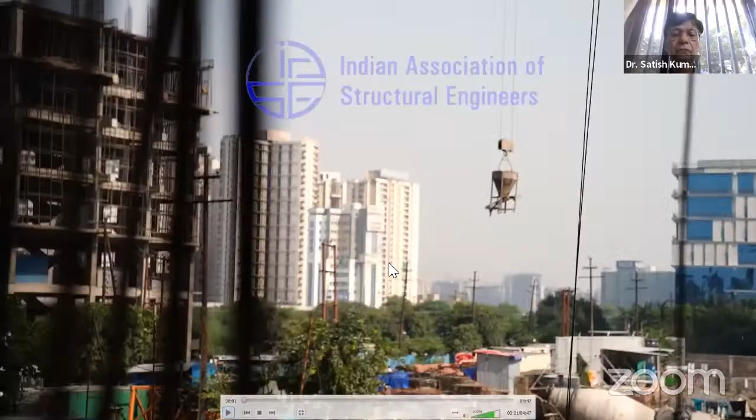The Indian Association of Structural Engineers, also known as IAStructE, was conceptualized and constituted in the year 2002 by a group of senior professional structural engineers from all over the country. IAStructE is registered under the Societies Registration Act 21 of 1860.

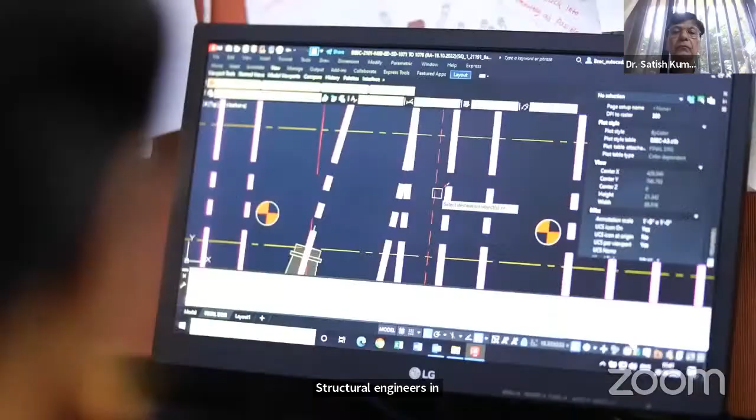IAStructE is a national apex body of structural engineers in India with a mission to promote the structural engineering profession and cater to the professional needs of the structural fraternity. In the short span of two decades, the association has attained an eminent position in the professional field. Its membership is valued very highly in the profession.

Since inception, IAStructE has been led by eminent structural engineers like late Shri Mahendra Raj, late Shri Kumar Ghosh, Shri Subhash Chand Mehrotra, Professor Mahesh Tandon, Shri Alok Bhaumik, Shri Manoj Mittal and Professor R. Pradeep Kumar as its president.

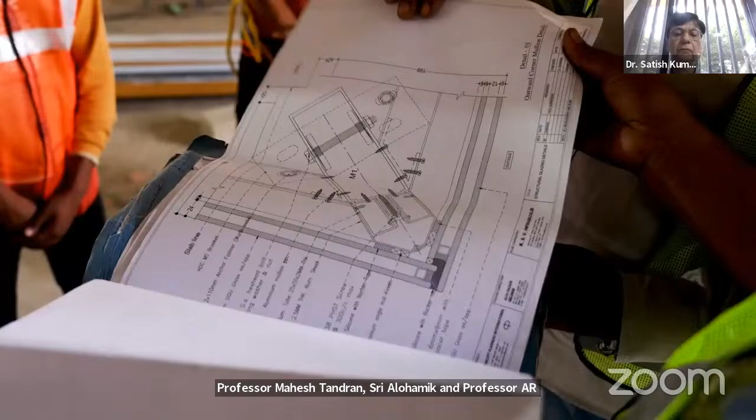IAStructE is a permanent member of the Engineering Council of India and interacts with the government on professional and policy matters related to civil and structural engineers. To expand its reach, IAStructE has collaborations with various international professional like-minded associations and institutions.

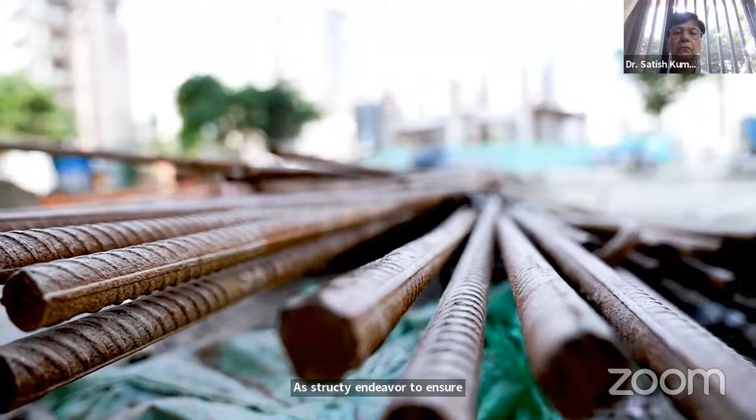IAStructE's prime objective is supporting and protecting the profession of structural engineering by upholding professional standards and acting as a mouthpiece for structural engineers in India. IAStructE endeavors to ensure that its members develop the necessary skills in structural engineering and work to the highest standards by maintaining a commitment to professional ethics and standards.

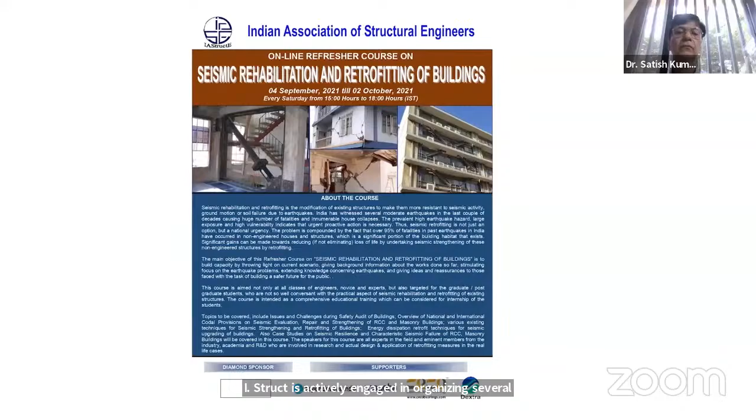IAStructE is actively engaged in organizing several continuing professional development (CPD) courses for structural engineers to help them update their knowledge and advance their career paths. It also conducts refresher courses for young and practicing engineers and student-oriented programs.

Seminars, workshops, conferences, technical lectures and discussions related to the latest technological advancements and case studies are also organized regularly for members to enable them to continuously update their knowledge and skill set by interacting with the best minds from the industry. IAStructE's activities are widely appreciated and known for quality technical content.

IAStructE is also actively engaged in publishing its quarterly journal Structural Engineering Digest (SED), code commentaries, professional guidelines and a monthly newsletter. IAStructE's publications are becoming popular with time.

IAStructE has representation in various technical committees of BIS and IRC as well. Its members are actively contributing to National Code Formulations.

In the year 2020, IAStructE started a National Awards competition to stimulate interest in the structural engineering field and to promote innovative thinking and creativity. The awards are presented to winners in recognition of their outstanding contribution to structural engineering in categories which include Outstanding Structure, Outstanding Structural Engineer, Outstanding Woman Structural Engineer, Promising Young Structural Engineer, and Best Master's Thesis in Structural Engineering.

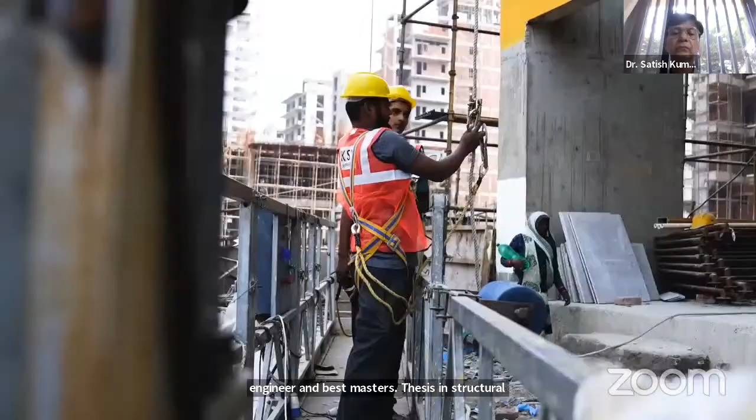IAStructE is currently operating from four regional centers, namely Eastern, Western, Northern, and Southern, with its headquarters in Delhi, to inculcate professional culture and provide handholding to budding engineers. IAStructE also has student chapters in several leading engineering institutions.

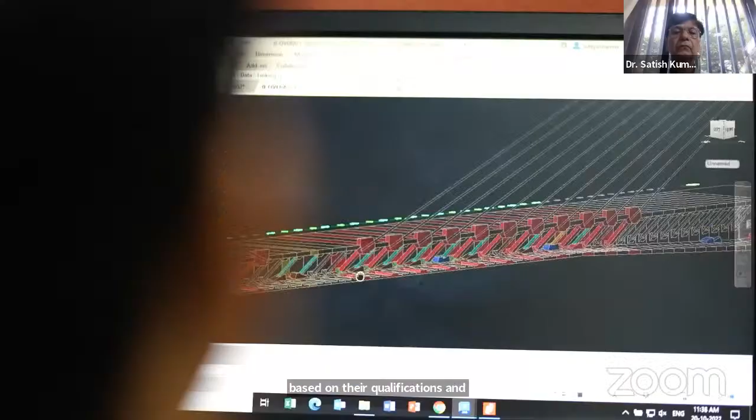Membership of IAStructE is open to all civil and structural engineers engaged in the structural engineering profession. Members are elected based on their qualifications and experience in different grades as per eligibility requirements prescribed in the bylaws. Each application is carefully scrutinized before electing the members.

More information about IAStructE is available on its website, www.iastructe.co.in.

Yeah, Dhawan sir, please start. Okay.

So today I am making a presentation on a very important topic of earthquake-resistant design of foundations. For the information of dear participants, may I submit that there is a dedicated course on the same subject being conducted by Professor B.K. Maheshwari of IIT Roorkee.

I was myself a beneficiary of that course. 18 people qualified in that course, and I am one of those 18 people. I am still a learner, like our coordinator, respected Dr. S.K. Dhawan ji, who got his doctorate at the age of 77. I am still a student, a learner, and NPTEL courses I am still undergoing. I am entering now for the 12th certification course. This was one of the certificates which I earned from NPTEL, an organization funded by Government of India. So this single lecture obviously cannot replace those 40 lectures by that IIT Roorkee professor.

So I will be discussing some basic issues relating to the subject matter. Here in the inset, we see the photograph of Japan on 1st of January this year when we had an earthquake of magnitude 7.6, which caused casualties of the order of 160 persons there.

Here, let us have a look at the Mother Earth. Outside we have the crust, then we have the mantle. People have classified this mantle also into upper mantle and lower mantle. Then we have outer core and inner core. At the crust, we have various temperatures, 30 degrees, 20 degrees, 0, sub-zero also. As you move toward the interior, toward the center, temperature rises up to around 5,000 degree Fahrenheit. So here you have a solid mass near the center.

The outer core has molten material. This inner core has nickel, iron, etc., and specific gravity of the materials is of the order of 13.5 to 14. Whereas at the ground surface, specific gravity of the material is of the order of 2.6, 2.7, etc. So as you move towards the center, specific gravity rises. Average specific gravity of the material across the radius of this earth is of the order of 5.5, and there are temperature differentials also, so there are thermal gradients across the radius.

Below this crust, you have rocks and soils, etc., and these rocks are fractured. At macro level also, there are 7 major plates. Our area falls in the Indo-Australian major plate, and there are 14 minor level plates which have been identified by geologists. So there are thermal gradients across the radius.

The Earth is moving about its own center, and it is also moving in the solar system. There are cracks and fissures within the body of the Earth, and because of such actions, there is lava eruption from time to time in various parts of the world. In India also, there is one barren island located in the Andaman and Nicobar Islands, where we have this volcanic activity every day. That particular island is burning every day, but there is no habitation there. In Japan, there are lava eruptions at a number of places, and this is one of the causes of earthquakes.

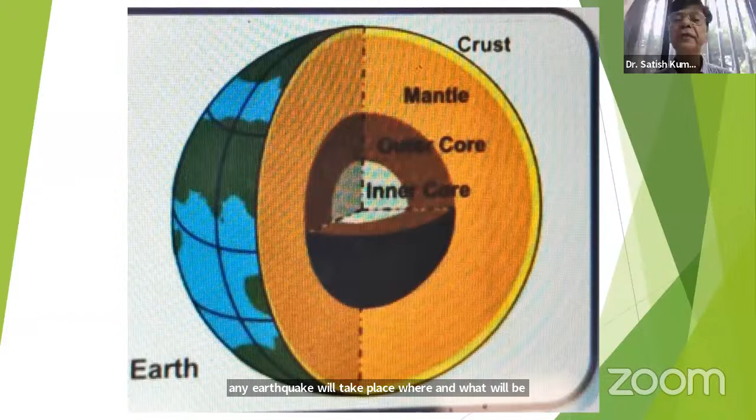Below this lithosphere, the top one, say around 100 kilometers or so, material is relatively fluid, and in the outer core it is all liquid material with quite high specific gravity. So in this type of unstable floating system at macro level, we can never say when any earthquake will take place, where, and what will be the magnitude of that earthquake. So the whole thing is very probabilistic. We are placed in a situation where we are neither sure about the magnitude of the forces, nor sure about the resistance of the soil also. Of course, a lot of research is going on, and I will show some of the slides relating to that.

Let us have a look at the basic terminology. Here we see the ground surface, horizontal one. Then this is a fault line. Fault line is a weak plane, and most earthquakes happen with focus lying along this fault line. The point where this release of energy takes place is known as focus, or hypocenter. The point vertically above the ground is known as epicenter. And the distance from this epicenter to focus is known as focal depth.

When we talk about magnitude of an earthquake, it relates to the extent of strain energy released at the focus. When we talk about intensity, it is what we feel at various places on the earth. For example, near the epicenter, intensity will be maximum. As you move away from the epicenter, this intensity comes down.

I have seen that many times, many of our enlightened friends holding doctorates also mix up intensity with magnitude. Both are quite different. Magnitude is at the focus, intensity is at various places on the earth. For example, on New Year this year, Japan faced an earthquake. In Japan, they felt the intensity, whereas in our country, we did not feel anything. So there is a lot of difference between magnitude and intensity, which we must know.

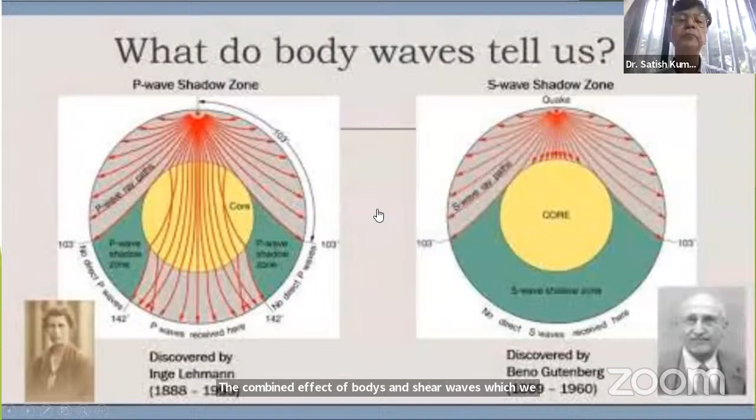Here in the insert, we see a photograph of Lehmann toward the left who discovered the P wave, which we call compressional wave also. Towards the right, we see the photograph of the discoverer of S waves. P waves we also call primary wave or compression wave, and S waves we call shear waves also, or secondary waves. So the combined effect of body waves and surface waves, which we see at site at various locations, our foundation and superstructure react to the action of these body waves and surface waves. On the left, we see the propagation of body waves, and the effect on our structures and foundation, which could cause instability of the soil also.

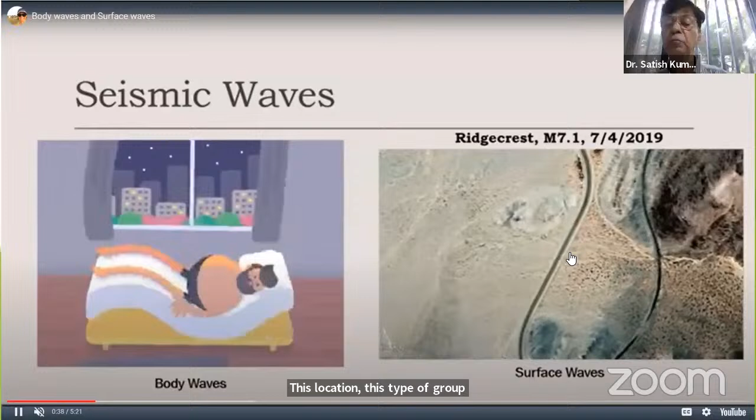On the right, we see a photograph which shows the ground movement due to propagation of surface waves. This photograph was taken 5 years back in America, where an earthquake of magnitude 7.1 struck. This type of dislocation, this type of ground movement, can cause a lot of damage to the foundation and to the structure.

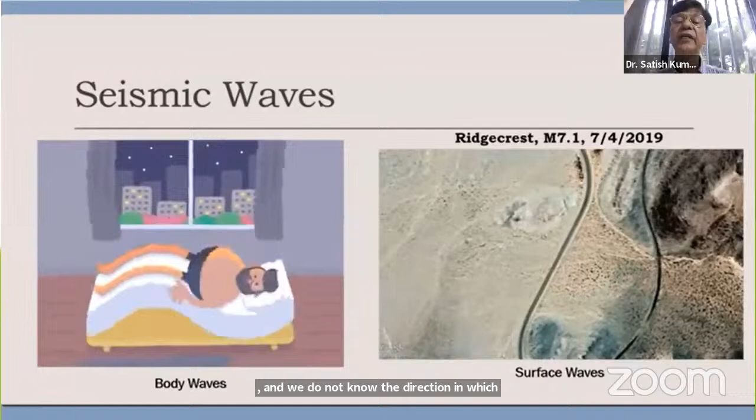We do not know the direction in which an earthquake wave will strike, or what the magnitude will be, whether it is predominantly in the horizontal direction. Generally, it is in the horizontal direction, but we have come across cases of vertical motion too. For example, in 1995 in Kobe, many bridges failed because of motion predominantly in the vertical direction.

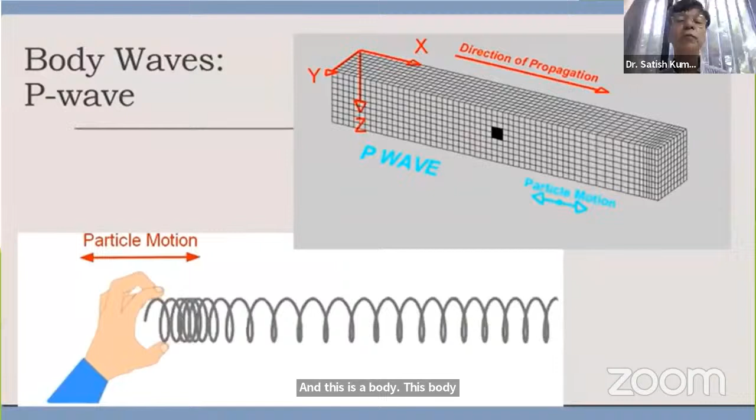Here we see the physical action involved in case of P wave propagation. In the bottom, we see the physical picture. The spring action is analogous to the behavior of any element of soil below the ground surface. This is the direction of propagation of the wave, and you see how an element of soil gets compressed. This P wave consumes around 7% of the total energy released in an earthquake, and this is a body wave. Body waves propagate down below. Focus is below the ground; it may be located at 50 kilometers, 100 kilometers.

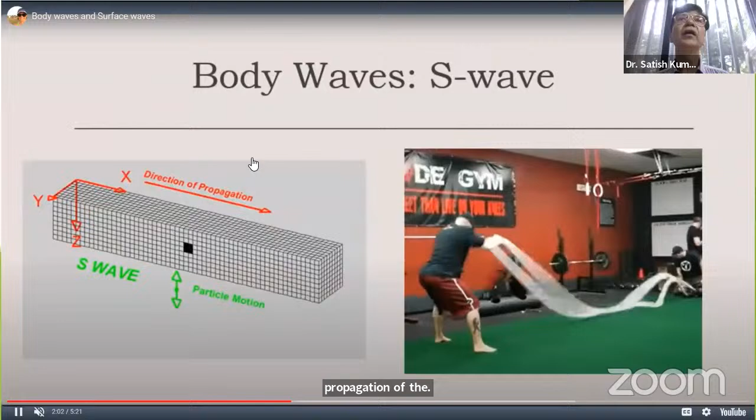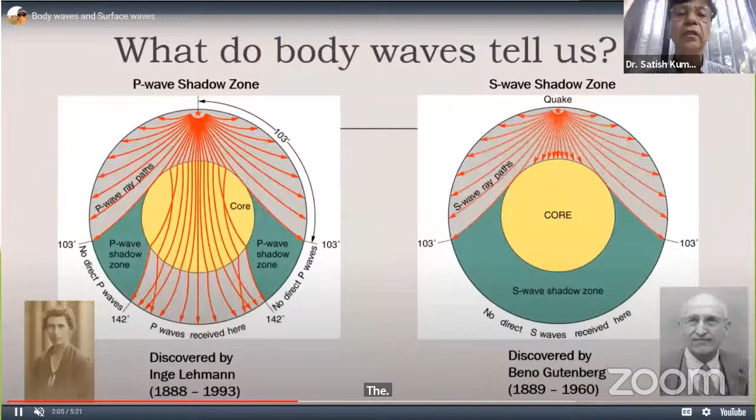Now we see the physical action involved in case of S wave. On the right side, we see the physical picture, the physical analogy, showing how particle motion can take place with reference to the direction of propagation of the wave. This S wave consumes around 25% of the energy involved. So, taken together, the P and S waves consume around one-third of the total energy in an earthquake.

The remaining two-thirds of the energy is consumed by propagation of surface waves. There are two types of surface waves of interest to us, namely Love waves and Rayleigh waves. Rayleigh wave is the most disastrous. The propagation of these waves is similar to what we see when we throw a piece of stone in a pond; there is elliptical motion of the particle. Likewise, the Rayleigh wave is very, very damaging, the most damaging, and it consumes around two-thirds of the whole energy.

I'll proceed further. Love waves do not consume much of the energy; generally, propagation is along the surface in the horizontal direction only. In case of Rayleigh wave, it is the combined effect of the P wave, compressional wave, and vertical component of the S wave, which interacts with the ground surface and creates Rayleigh waves.

In fact, it is a combined action of all these together. At any recording station, we have a record of all these types of waves. The record shows the amplitude of vibrations and the element of time also. Seeing those seismographs, in case we have 2-3 recording stations around any focus, if you know the velocity, velocity into time gives us the distance. In no time, we are able to locate exactly where this focus is.

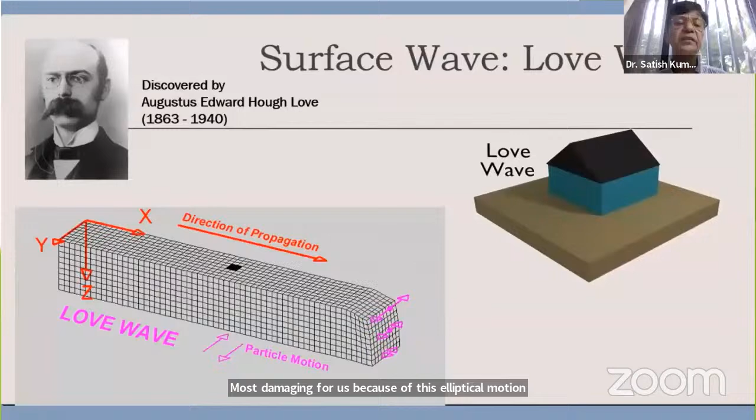Now, the major question is, we are doing a lot of research at micro level, how the soil behaves, how structure behaves. That is all micro level. The major question is whether we know the movement of these major and minor plates. We do not know. We are in the dark. It is something like a gray box mechanism. We know something, we do not know most of the things. We are never able to predict. In China, they say that they could predict something.

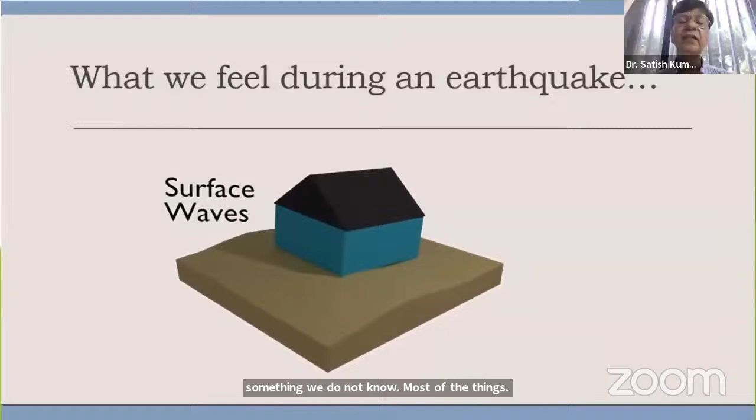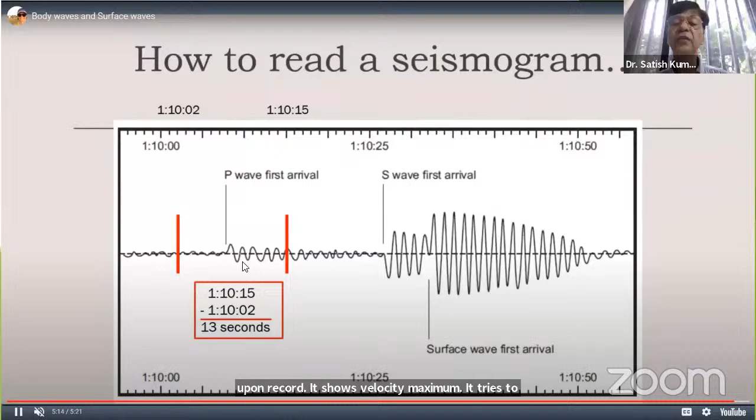This is the photograph of one record. It shows P waves, velocity is the maximum. It travels through solid, liquid, gases, then S wave, then we have surface waves. Here, the amplitude of the wave is less, then it increases.

So let us proceed further. Now, let us see about this measurement of magnitude and intensity. Both are quite different. Many of my friends I have seen, they are mixing up the two. Richter scale is being followed all over the world.

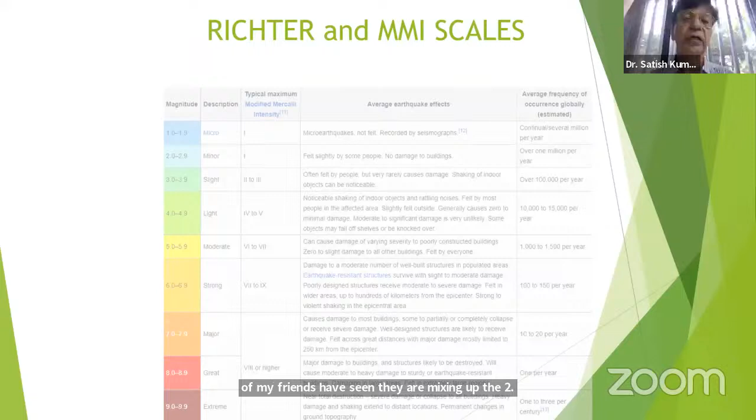This is quantitative in nature. The values, the first column shows the magnitude, 1 to 10. 10 means total disaster, hardly anybody will survive. So the maximum magnitude in recorded history was in 1960. In Chile, they had an earthquake of magnitude 9.5, which caused disaster there.

And in our country also, for example, the tsunami of 2004, that magnitude was of the order of 9, which caused heavy loss of life, particularly in the Nicobar region, Andaman and Nicobar region. I was privileged to be Commissioner cum Secretary and Chief Engineer there. I came across so many cases, so many people died.

So magnitude varies from 1 to 10. As we move from 1 to 2, 2 to 3, this amplitude of the wave gets multiplied by 10 times. If you talk about the energy level, 1 to 2, 2 to 3, this energy level jumps by around 31 times. If you compare one earthquake with magnitude 2 with an earthquake of magnitude 3, the multiplier is 31. Then if you go to magnitude 4, again multiply by 31. So if you compare energy released in an earthquake of magnitude 4 with that of 2, the multiplier is 1000. Likewise, if you compare energy released in an earthquake of magnitude 6 with that of 2, the multiplier will be 10 lakh times. It is like this.

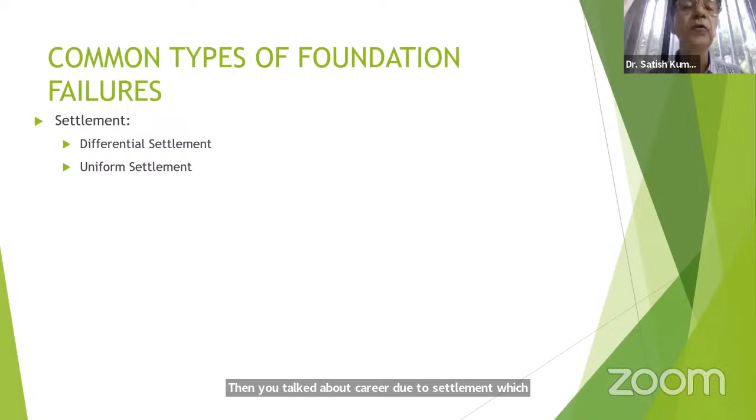A popular example of differential settlement is the Leaning Tower of Pisa, which is tilting with reference to the vertical by 5 degrees. So that is a major tourist attraction. In fact, it was tilting more. Government of Italy around 25 years back brought it back to a level of 5 degrees inclination so that it maintains that tourist attraction. Professor Jamiolkowski was involved as a consultant for bringing it back.

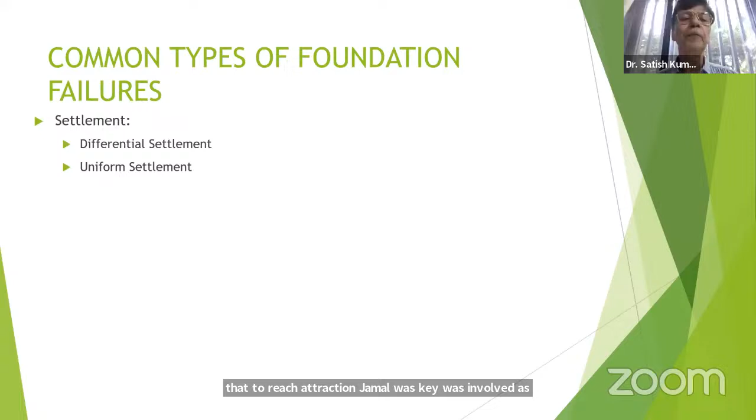And by chance, he was here in Indore, where from I am speaking, to make a presentation on the Leaning Tower of Pisa. At some point of time, I had the honor of seeing that Leaning Tower of Pisa also, and I had the occasion to meet that Professor Jamiolkowski also, who was here in Indore, who made a presentation.

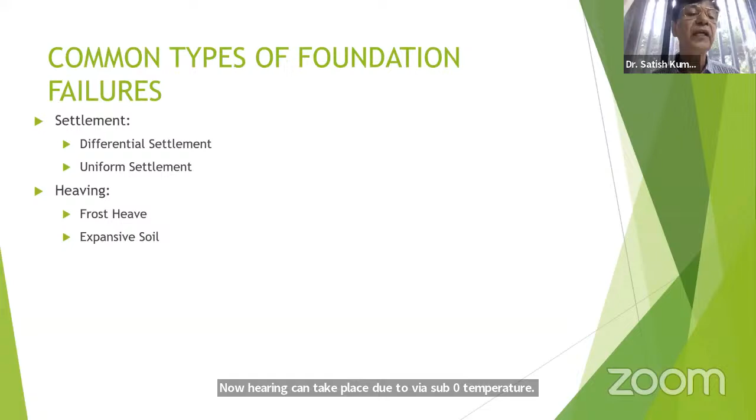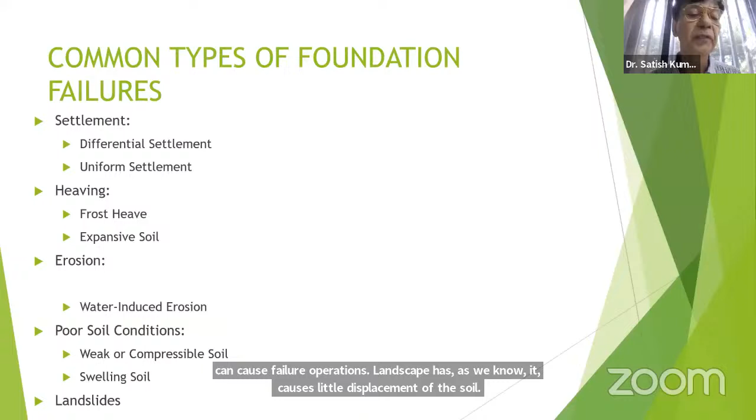Now, heaving can take place due to frost action. In Ladakh, we have sub-zero temperature also. Heaving can take place due to expansive soil also. There can be erosion of the soil due to air, due to water also. Then we can have compressible soil, swelling soils, which can cause failure of the foundations. Landslides, as we know, cause lateral displacement of the soil. Volumetric strain can be of the order of 20%, 30%, etc., and it can cause failure of the foundation.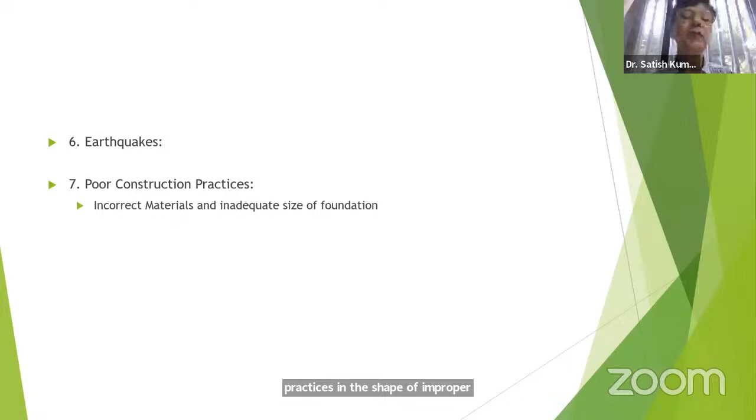Earthquake is the subject matter of discussion today. As we are all aware, it is highly damaging for the foundation also, for the superstructure also. There can be poor construction practices in the shape of improper quality, incorrect choice of materials, inadequate size of the foundation, not following practices as per laid down practices of design and detailing.

And a popular example is from the previous month - within a fortnight, as Dr. Dhawan sir also mentioned in the previous presentation, more than 12 small bridges failed.

How come none of our structures, despite magnitudes of very, very heavy earthquakes of the order of magnitude 9 also, have suffered all this without damage? And how, despite all our knowledge at our command regarding water-induced forces, floods, discharges, forces generated out of that - all that knowledge available for hundreds of years - how did those bridges fail? There lies all the difference.

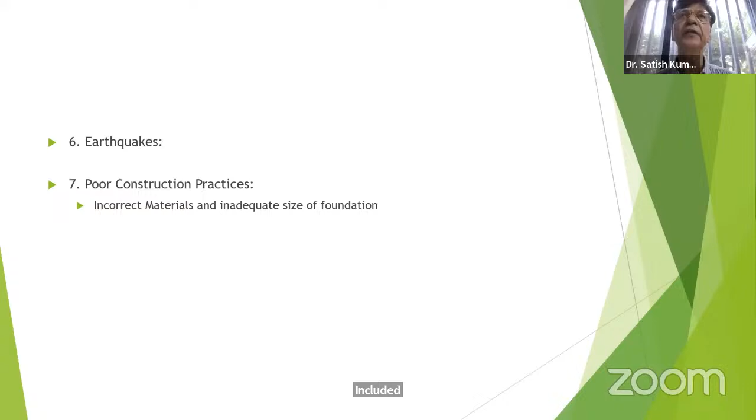This is what I'm trying to emphasize in today's presentation - why my structures are not failing, Dr. Dhawan sir's structures included, and why these other structures are failing. I'm not making adverse comment on anything specific because the whole process is under investigation. It is proper choice of materials, proper sizing, proper design and detailing, which we are trying to follow, which saves us. And others, in whose cases failure occurs, are ignoring those aspects, knowingly or unknowingly.

Now there is the issue of pore water pressure, there can be leakage of underground pipelines also. I remember one case of Palwal in Haryana. I had gone for a course at Roorkee, and we had a technical tour to Palwal also.

At a hilltop, there was a house and there was a water supply pipeline passing below. It leaked heavily, which caused instability of the soil, tilting and damage to the foundation.

In the superstructure, we are surprised to see a particular room in which all three edges in a corner, in the X, Y, Z directions, were torn apart to the extent of around 2 feet each, as if somebody used a knife to cut those edges, up to around 2 feet each. Right in the middle of the slab, we saw ring-like cracks.

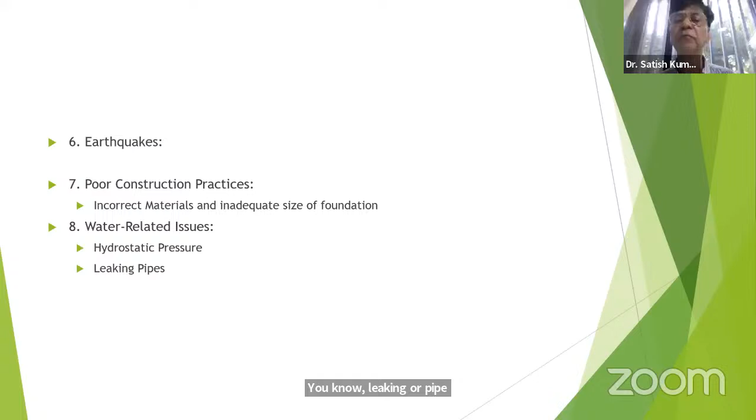Leaking of pipe down below can destabilize your foundation, and it can affect your superstructure also. There can be root intrusion into any structural element, which can cause failure of the foundation.

There is a British guideline available on this subject, which says that the distance of any tree from any structural element should be at least equal to the height of the tree. I don't think anybody in the world is following this type of guideline. Trees we are planting, their roots will definitely grow, and when they grow, they will definitely intrude below our foundation and structural elements and will definitely cause distress, including failure.

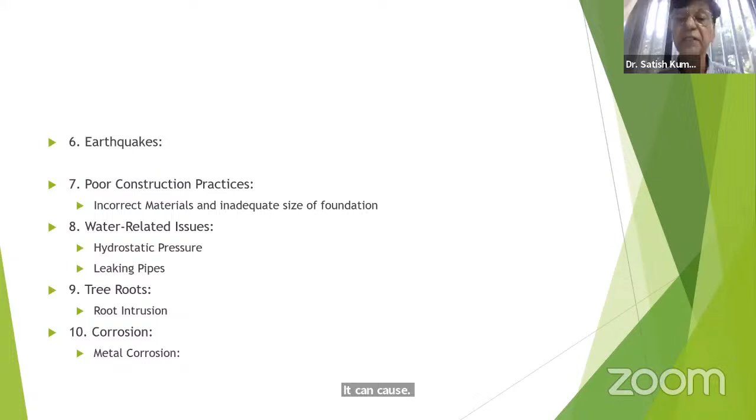Corrosion, as we know, as soil and water is loaded with chlorides, sulfates, nitrates, phosphates, can cause failure of foundation made of RCC and steel and any other material, and can cause failure.

It has just toppled down. The vertical structure has become horizontal. Who is the person on earth who can predict this type of response in close proximity? Whatever our studies are, those are at micro level also. At macro level, earthquake does not require any permission from any one of us.

It comes at its own will. It can strike anywhere with whatever magnitude possible. Today I am speaking from Indore, which appears to be a very stable place, but tomorrow itself there can be a very, very strong earthquake of magnitude 9. I do not know what the rocks sitting down below are loaded with, what level of strain energy.

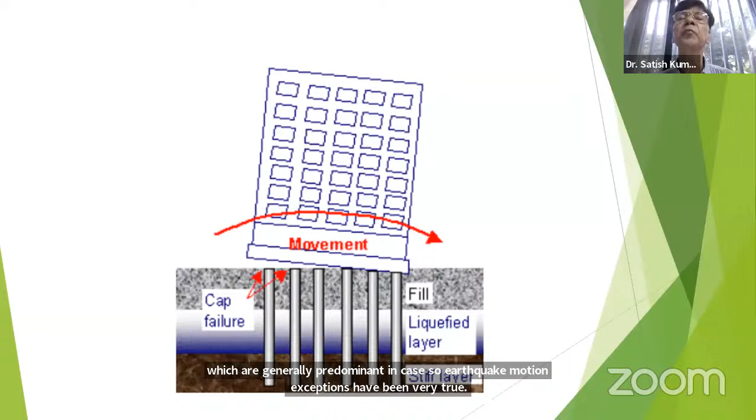In the Kobe earthquake in Japan, their vertical motion became very predominant, and there was failure of many bridges there in Japan in 1995. Here, because of loss of connection between the pile top and pile cap, failure can take place because of this overturning moment. So even in case of deep foundations, we cannot be complacent - failure is likely even under these situations.

Now, what is the test for soils? You see, the best test is at site - for example, prototype testing. My department, Central PWD, my parent department, under my respected senior Dr. S.K. Dhawan sir, who is still active and visible here on the screen.

It is verifiable. Now, next to that type of prototype testing is micro-level testing, which we are doing. So the last three tests which I listed here are the field tests, which we normally do.

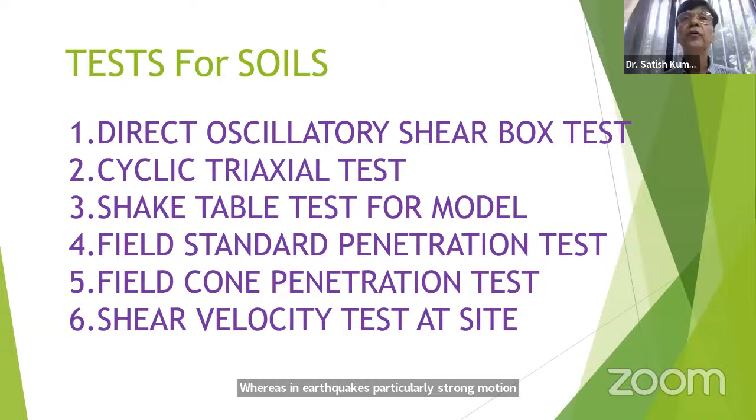High volumetric strains exist in case of earthquakes. It is just not possible to do high volumetric strain testing in any of these three field tests. You can do testing only at low levels of strain, of the order of 1%, 2%, or a fraction of that. This is the limitation of field tests, whereas in earthquakes, particularly strong motion, you have strains of the order of 20, 30% etc. So to simulate these conditions, you have to invariably go in for lab testing.

In the lab it is possible to simulate these conditions. You can do simulation studies for 20% strain also, 30% strain also. People have done such tests, and there are many research reports available.

Let us talk about the shear test. Normally we do this, particularly for cohesionless soils, to find out shear parameters C and phi. We have a small sample size, 6 centimeter by 6 centimeter. Normal load is applied, then we subject it to shearing, find out the normal stress and shear stress values, and plot a graph. The line joining those points gives the value of C, and the inclination of that line gives the angle of internal friction. We then use the equation S equals C plus sigma tan phi, which gives the shear strength. In a dynamic situation, both C and phi change.

In some cases phi, for cohesionless soil, increases because of densification, and sometimes phi decreases, particularly in case of clay etc. So C and phi are both subject to change under dynamic situations. You have to create oscillations in the laboratory, so the setup has to be different - it has to be an oscillatory test, and you have to find out dynamic values of C and phi in the laboratory.

Now the triaxial test we know we do in the laboratory. We have a small sample size, 3.8 centimeter diameter, 7.6 centimeter length. In a dynamic situation we have to subject it to a number of cycles. In static conditions, we subject it to lateral stresses, then apply deviator stress, and get values of minor principal stress and major principal stress at that height. Then we draw Mohr circles, with 2 or 3 tests plotted, which give us the value of C and phi under static conditions.

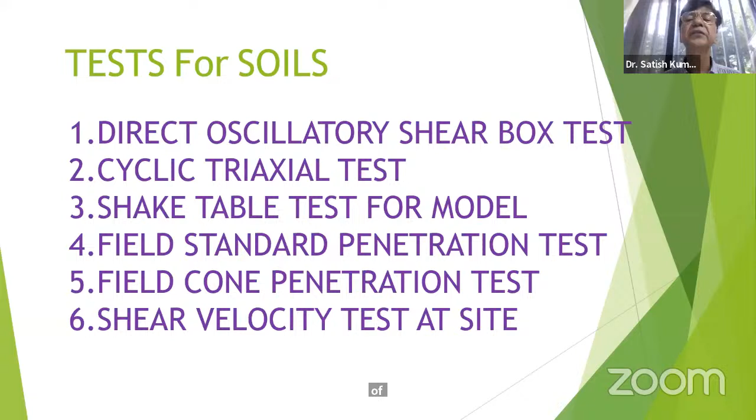I will cite some references towards the end. Participants who are more interested in deeper learning can go through them.

Now, what are the dynamic soil properties which are required to do simulation studies? We definitely need to know the type of soil, its name and properties like water content, density, and state of disturbance in the initial stage. Then, what is the change caused due to dynamic forces? Then, what are the number of repetitions of the stress, frequency of loading, shape of waveform, whether we are testing in one direction or two directions. All this testing is possible.

But again, I submit that any amount of accuracy in testing is only at the micro level. The macro level is still a gray box mechanism. We know very little. Most of the things are still unknown to us, despite all the knowledge available.

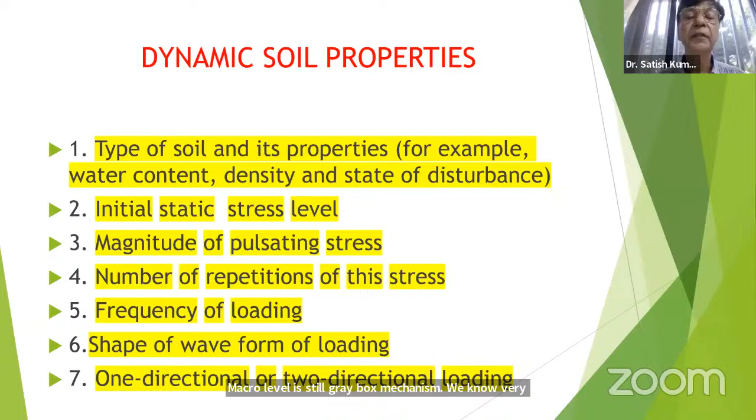Now, there is a major question whether the magnitude and time of an earthquake can be predicted. The answer is no. In China, they say they could predict, but there are so many variables involved. What is the timing? What is the magnitude? What is the amplitude of the waveform? Nobody can predict all these parameters, and it varies from place to place.

Soil response also we know little about. I have shown one picture where, in an earthquake affected area, we saw three types of responses: one structure was vertical, another was horizontal, and the third was inclined, all in close proximity. So whatever our studies are, there are limitations.

Let us be aware. So what can we do? With whatever accuracy we calculate, we cannot predict forces with confidence. It is only a rough assessment. We have to rely more on proper design and detailing, which is what my department has been doing all along. We can certainly do improvement of the ground. This will help. What we can do is stabilize the soil.

We know lime and cement can be used. We can do grouting of the soil also. We can densify soil by throwing heavy weights from great heights. Weights of the level of 15, 20 tons can be thrown from heights like 20 or 30 meters using cranes. This will cause cavities in the soil. In case the groundwater table is close to the surface, it can cause liquefaction also, and it can densify that soil.

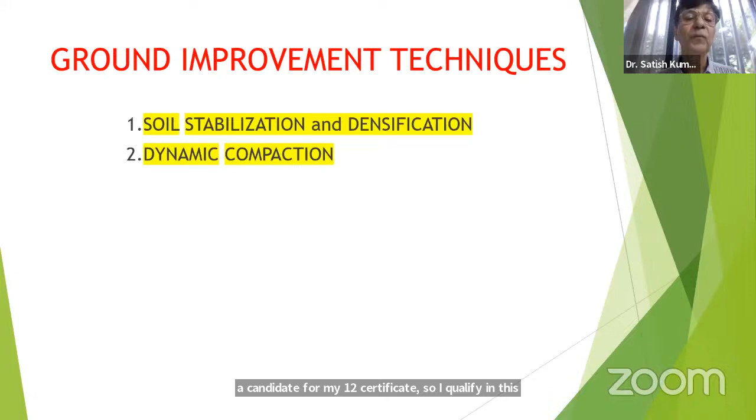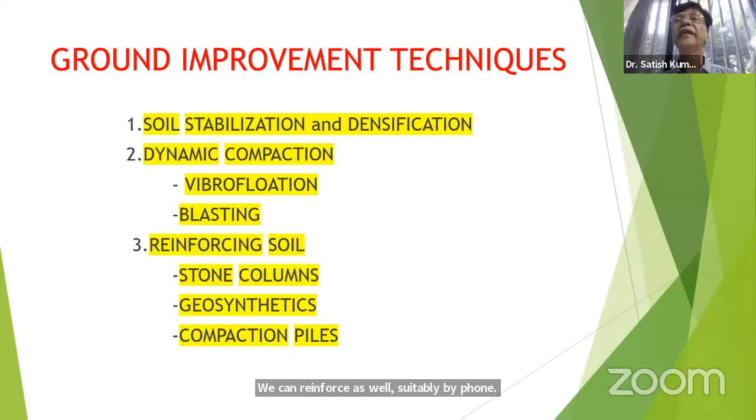Dynamic compaction, vibro flotation, as you know, are well-established techniques. We can go into blasting also. We can reinforce the soil suitably by stone columns, geosynthetics, compaction piles. Good books are available on this subject, Indian books also by Dr. Purushottam. Chinese American Dr. Jie Han has written a great book, and the Indian edition is available, covering most of these techniques, including design examples, at affordable cost to us.

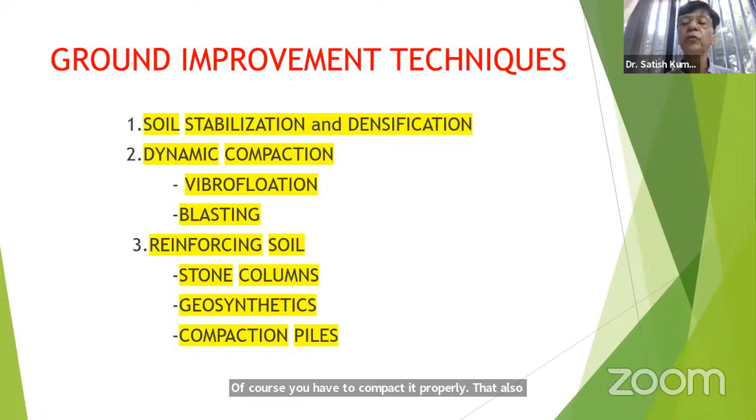These piles can be in timber, concrete, steel, and even gravel, though you have to compact it properly. That also improves the ground. And drainage, as we know, improves the ground characteristics, including shear characteristics. So ground improvement is in your hand; proper design and detailing is in your hand. Now, beyond that, there are mechanical devices which can be used.

For example, in structures, they have been using TMD system, tuned mass dampers. These are damping devices used to absorb energy. In Taiwan, they had an earthquake recently with magnitude higher than what Japan had, yet casualties reported were of the order of only 10. They have been using these devices.

And there is another device for base isolation. Here the spelling is not correct, kindly excuse me, it should be BASE isolation. This is already used in our country, in Bhuj, during reconstruction. In a hospital, it was used, and there are thousands of applications in our own country.

What does it do? It isolates the structure from the substructure. The foundation and structure are separated by these devices, placed at the interface of the structure and the foundation. The earthquake ground motion is absorbed by this device, and your structure is saved.

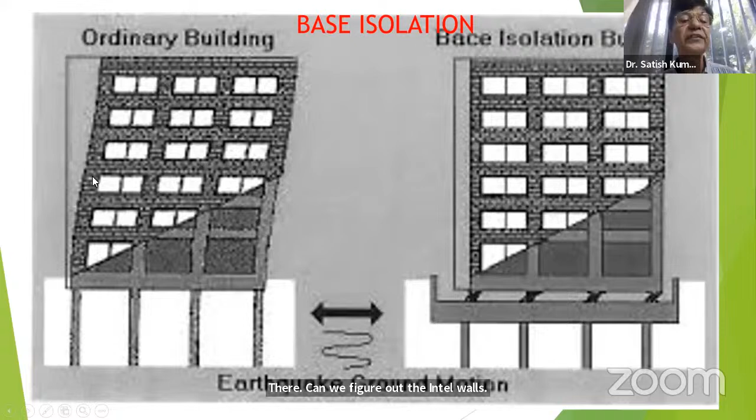All the stories suffer lateral deformation to the same extent. If you don't use such devices, this is the second picture: various stories undergo drift of various levels. There can be failure of infill walls, and structural elements can also suffer cracking due to excessive lateral deformation from earthquake.

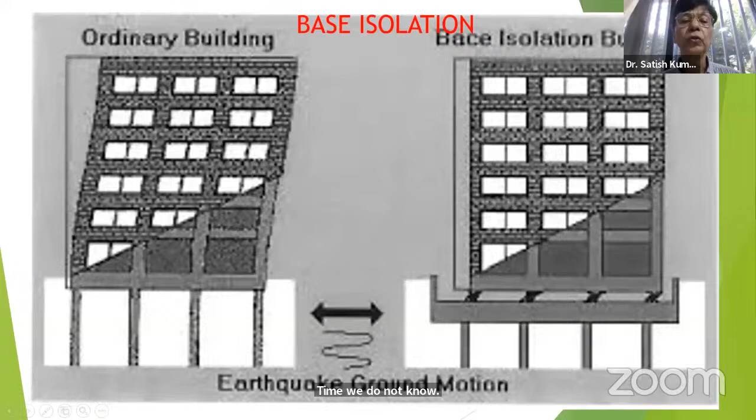And magnitude, we do not know. Time, we do not know. Soil response, we do not know. Whatever studies we have are at the micro level only. The macro level is beyond our control, that is at the mercy of the Almighty.

What is the Indian Standard Code of Practice? That is in our hands. We should follow the norms. IS 1893 is the code of practice which gives us the criteria for earthquake-resistant design. There are other codes also relating to earthquake design and detailing for non-engineered construction.

All these codes are available free of cost, free downloads are available. Part 1 deals with buildings, Part 2 deals with water tanks, Part 3 deals with bridges and retaining walls, and Part 4 deals with other structures.

This code considers the whole country divided into 4 zones. Earlier we had 5 zones: Zone 1, 2, 3, 4, 5. But what happened? In Latur, Kilari, in 1993, we had a strong earthquake, so we lost faith in that zone 1 classification. Now that zone 1 must be zone 2, we don't have any zone 1 now, so zone 2 is the smallest zone.

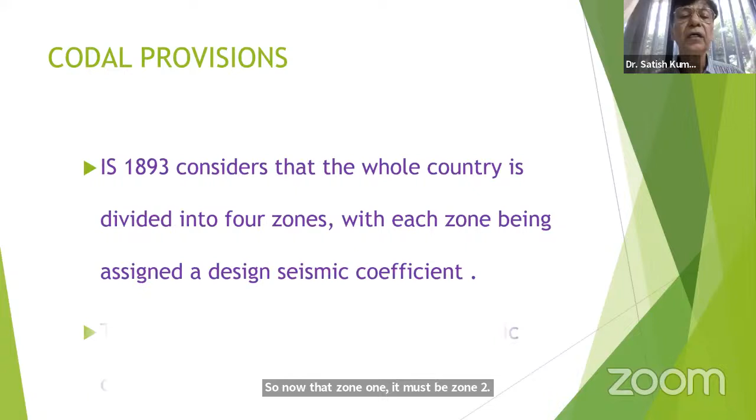Horizontal acceleration is to be multiplied by a seismic coefficient, the expression for which is given in our code, to work out the acceleration in the horizontal direction. Likewise we can work out acceleration in the vertical direction. If you know the acceleration, using Newton's law, mass into acceleration gives the force. And if you know the distance of the CG from that force, we can calculate overturning moments. This is very simple logic which we can do.

Now this is the seismic map. Zone 1 is not there anymore; the safest zone is zone 2. I am sitting here at a zone which is at the boundary of zone 2 and 3. We think that this is the most stable, but tomorrow there can be a strong earthquake here itself. Here we had a strong earthquake in 1936 and later on also.

Chennai is in zone 3, relatively more stable compared to zone 5 shown in deep red color. There also, in 1925, there was a strong earthquake, and later on also, with damage due to tsunami waves. There was very heavy flooding some years back where one story of houses in the coastal region was just drowned. All these forces, we do not know how to look after. Most of these things are still unknown.

So zone 5, Andaman and Nicobar is in zone 5. I happen to be Commissioner, Secretary and Chief Engineer there; that is the most vulnerable. In North Andaman, Diglipur, we have earthquake shaking every day, of course magnitude is very low so it's not reported. The Northeast is zone 5, as is the Himalayan range and areas of Gujarat near Kutch. All these are most vulnerable based on previous records.

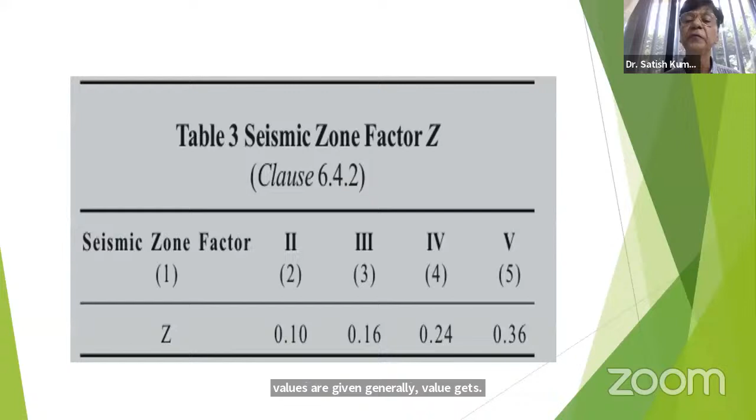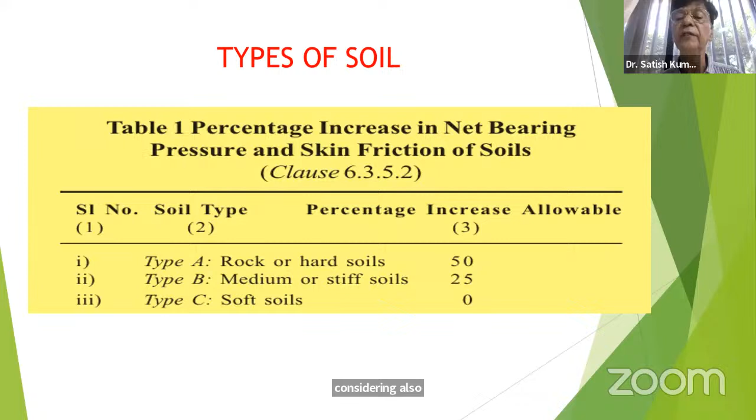Generally, value gets multiplied by around 1.5 times as you move to higher zones. For various types of soil, if you are considering earthquake loading also, other than the normal loads of dead loads and live loads, the code permits an increase in net bearing pressure and skin friction up to 50%.

In case of rock or hard soils, which are the best types of soil, the increase is up to 50%. For medium or stiff soils, this classification is based on the N value, which I just showed briefly, and this percentage increase is allowed up to 25%. For soft soils, which are the most vulnerable, these can amplify the wave amplitude and cause heavy damage, so no such increase is allowed, for obvious reasons.

Now, the code gives acceleration values against natural time period for 3 types of soil. Obviously, against any natural time period value, it is minimum for hard soil and maximum for soft soil, as expected. For medium soil, it is in between.

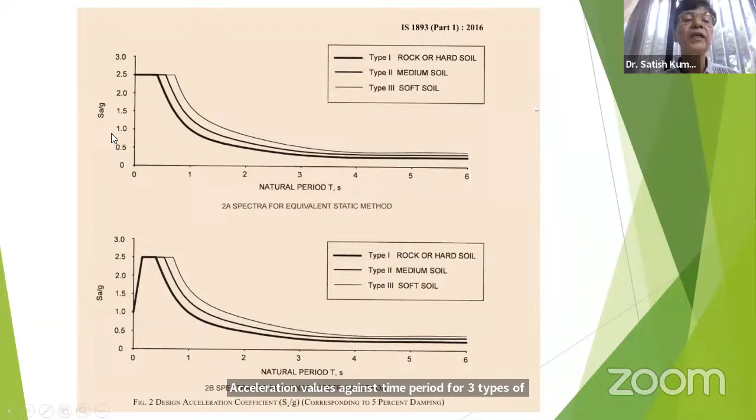There are 2 types of graphs, and these are against consideration of 5% damping. Normally, this damping value varies from 1 to 10, and for values other than 5%, correction factors are available in the code. The maximum value given is 2.5.

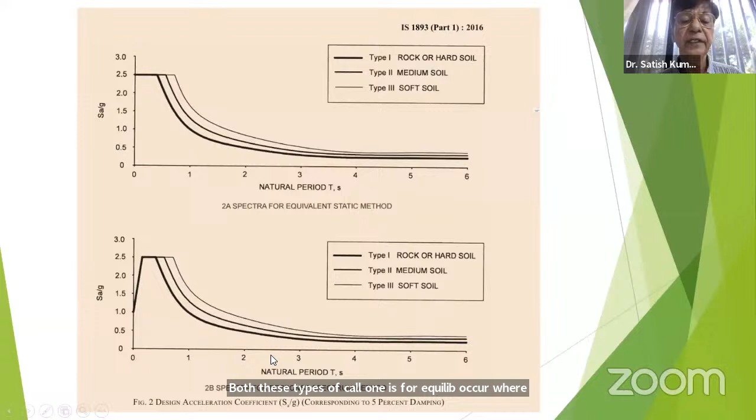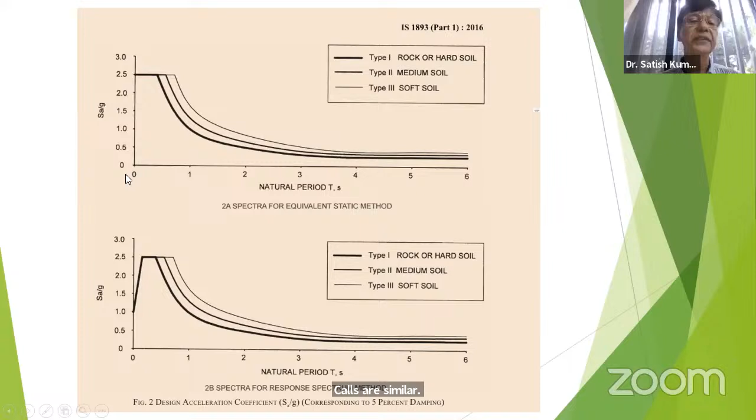Both types of curves - one is the equivalent static curve, where we are converting dynamic loading into equivalent static forces; the second is dynamic loading based on a spring mass system, etc. The curves are similar, with a minor difference when the time period is less than 0.1 second. Otherwise, values are similar, and you can follow any of these techniques as per this code.

The code gives an expression for design horizontal seismic coefficient: Z by 2, SA by G, I by R. Z is the zone factor given in the table.

Now, what is this 2? Our philosophy of design is that under minor shaking, we should have minor cracking, etc., which can be easily repaired. Against moderate shaking, you should be able to repair and rehabilitate. Against very strong shaking, there should not be any collapse. So we never design structures for the maximum credible value. Our philosophy, as per the code, is to design for 50% of the maximum credible value. That is why this value 2 comes in.

Of course, in case of other structures like atomic structures, we cannot take any risk, so there we don't follow this provision - you have to apply a suitable factor of safety. If there is failure in that type of structure, there will be catastrophic damage, not only to the structure but to human life also. So there, things are different. For most other structures, including those done by my department, we follow this practice.

For Sa by g - we have to see from that graph. I is the importance factor. For an ordinary building, it is 1. For structures with occupation of more than 200 people, this value is specified as 1.2. For important structures like hospitals, etc., the value is given as 1.5.

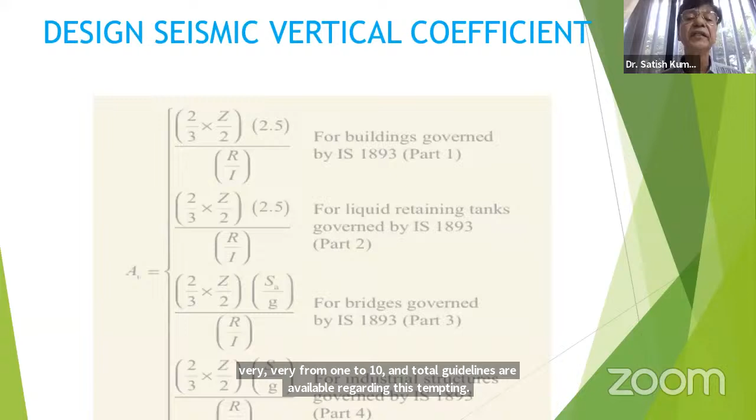Now, in the vertical direction, our thinking is that the acceleration in the vertical direction is 2/3 of what we have in the horizontal direction. Earlier, this value was 1/2, but there were so many experiences, particularly in Kobe, Japan in 1995, that everywhere all over the world this value was upgraded to 2/3. So our thinking is that there can be acceleration due to earthquake up to the level of 2/3 of what we have in the horizontal direction. That is how this 2/3 has come into our code.

And for buildings and water tanks, this maximum value of 2.5 against consideration of 5% damping has come. For other structures, you have to refer to the graph.

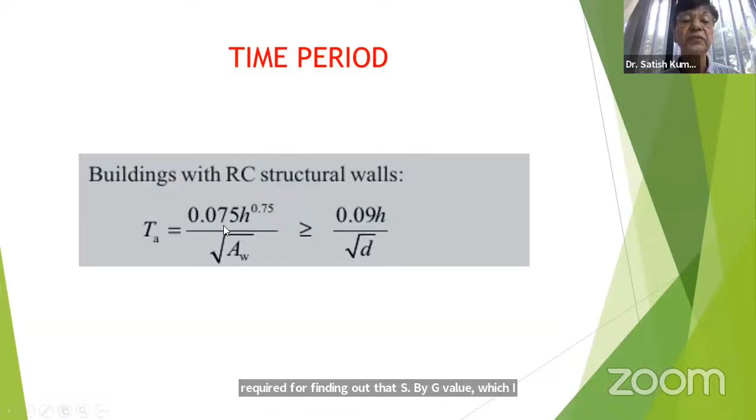The code also gives an expression for time period, which is required for finding out the SA/G value I had shown in the graph. It is related to the height of the structure, lateral dimensions, and area of the walls also. Against this time period, you look at the graph, find your SA/G value, use it in those coefficients, and then find out the acceleration in horizontal and vertical directions.

Now, what is the basic analysis? For an earthquake-resistant design, spread footings of columns must be interconnected. This first sentence is the most important.

Collectively, united we stand, divided we fall. The same philosophy applies to our superstructure. Wherever we connect properly by providing bands, corner reinforcement, etc., the structure stands. That is what we do in CPWD. And divided, we fall.

Provide connection at right angles. Earthquake waves come at random. Magnitude is not known, we are not certain about the magnitude, and we are not certain about soil resistance either. Whatever studies we do are at micro level. Macro level is still a gray area.

The bending moments and shear forces in beams may be computed like this. Determine the moment at the foot of each column, assuming the column is fixed. Assuming that the footing has no resistance to rotation, distribute the column moments found above in proportion to the stiffness of the foundation beams and columns joined at each footing.

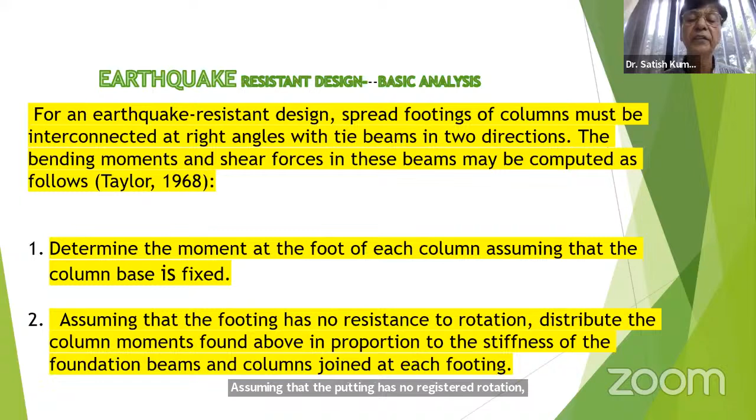In fact, similar philosophy we are following for superstructure also. When we do moment distribution, we divide any unbalanced moment in the ratio of stiffness of various beams and columns joining. Kani's method, etc., are based on the same philosophy. The grade beams connect various columns from the foundation system.

Minimum reinforcement should be 0.8%, and it could be higher depending on assessment of our forces. You have to provide stirrups properly with end hooks, and hook length should be minimum 10D as specified in the codes, and these have to be turned at 135 degrees. Experience has shown that wherever such types of beams have been provided, such beams have survived.

The beams with less end length, just turned at 90 degrees, which is the common practice, I am sorry to say in most of the private buildings and in government buildings also, because of lack of knowledge or because of our ignorance, those types of beams can fail. In my department, perfection is not possible, but we are trying to follow this.

Spacing of stirrups could be, dia could be 6 mm, 8 mm. Spacing can be minimum near the edges as per our calculation, up to 3 inches. It could rise to around 9 inches toward the center. We have to calculate properly, and emphasis should be on proper design and detailing.

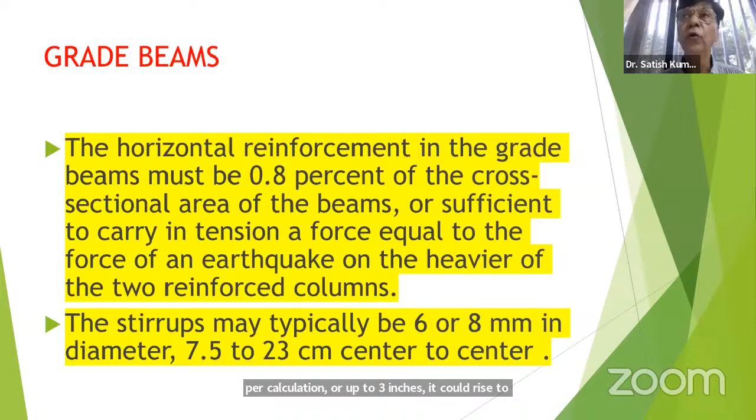No, this is available to compute effect of differential force of footing on superstructures. At research stage, we have some papers on that. Grade beams recommended are believed to increase the rigidity of the entire foundation.

This, I will say, is the most important. This connectivity helps. Refinement in analysis has limited importance. This may help reduce the differential distortion between the individual footings.

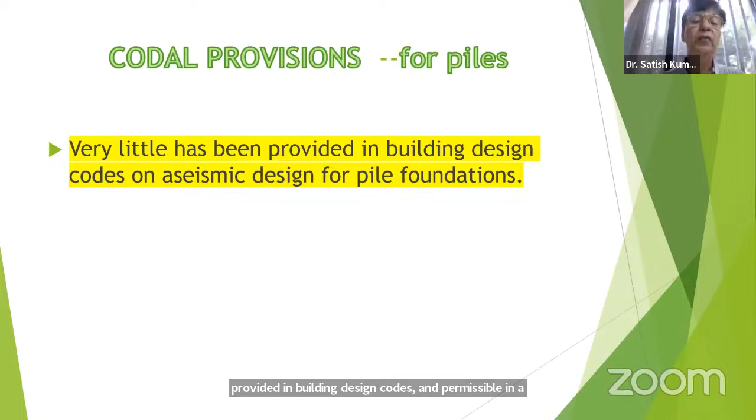Now, for piles, let us have a look. Very little has been provided in building design codes, and permissible increase I have shown in a table, and total loads on the piles are worked out from consideration of vertical load, frame moment, and local moment.

I am citing my great professor Prakash ji, Shamsher Prakash, great man. I had the honor of working with him at Roorkee before joining Central PWD. Then there is some Sharma, not me, he is some senior Sharma, and he is the first professor of soil dynamics in the country, had done great work. His student, Professor Swami Saran, great work, great books. I'll cite towards the end. They have done great work in our country in soil dynamics and dynamic resistance of piles, etc.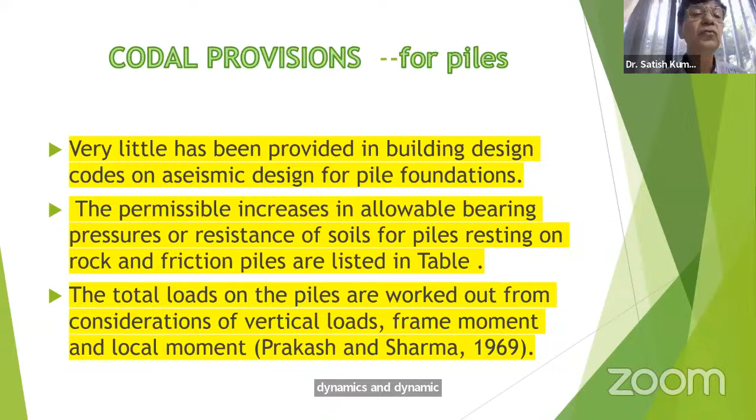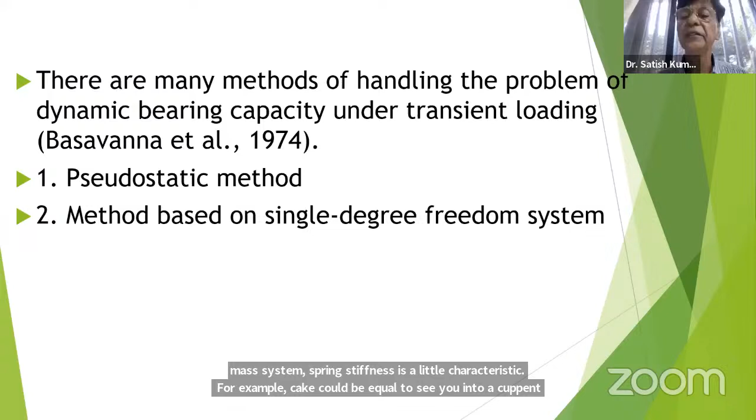There are many methods of handling the problem of dynamic bearing capacity, but these have limited value because macro level is not in our hand. Pseudostatic method, where we convert dynamic forces into equivalent static forces based on single degree freedom spring mass system, spring stiffness is related to soil characteristic. For example, K could be equal to Cu into A. Cu is coefficient of uniform compression, which we can find out by conducting tests. They will use 2D freedom, 3D freedom also, but complexity of analysis increases and it has limited value to us.

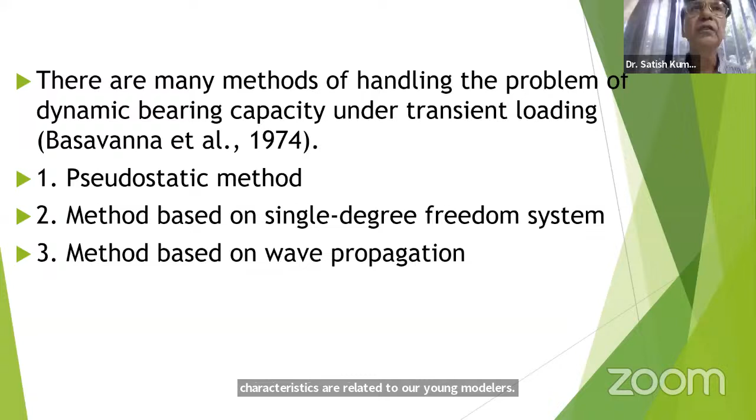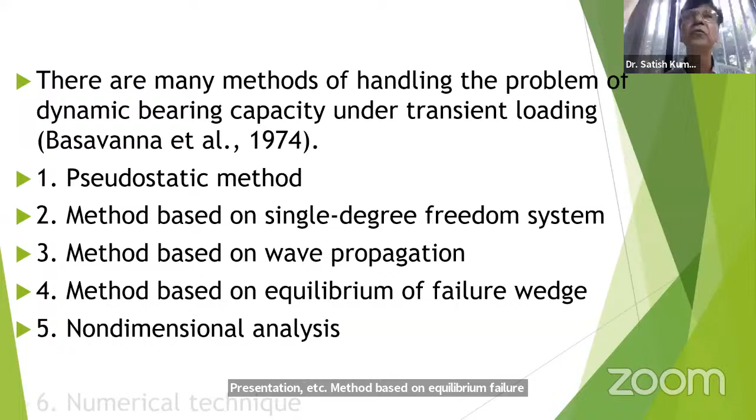Method based on wave propagation, wave characteristics are related to Young's modulus, shear modulus, Poisson's ratio, etc. Method based on equilibrium of failure wedge, here you have to consider dynamic loading also, non-dimensional analysis, numerical technique. I'll cite some references towards the end which give information relating to all these techniques.

Now, let me discuss another important situation: liquefaction. I'm hurrying up, I'm aware about the time constraints, I'll quickly try to conclude.

Liquefaction occurs only when there is proximity to water. In case the water table is very deep, there cannot be any liquefaction.

We had liquefaction in Gujarat, Bhuj, 2001, Republic Day, because there was water close by. It happens in case of silts and fine sands. In Gujarat, we had loose alluvial soil near the riverbed. Our structures suffered, our people suffered, heavy loss of human life and heavy loss of structures also. Generally it does not occur in rocks, and it does not occur in most clays, except sensitive clays and marine clay. Silt and fine sand, yes, it occurs.

Shear strength is given as S equal to C plus sigma tangent phi, the famous Mohr-Coulomb equation. If we talk about saturated or partially saturated sand, it is cohesionless, so C does not come into picture, cohesion value is taken as zero. Again for normal stress we have effective stress, and here pore water pressure comes into picture, which we can calculate easily. Pore water pressure is given by gamma W into Z, unit weight of water into depth. In case pore water pressure rises high and equals the normal stress, shear strength may come down, may vanish, and failure can take place.

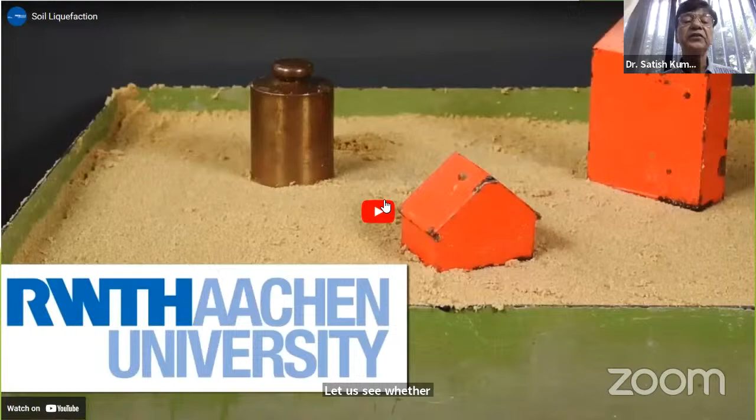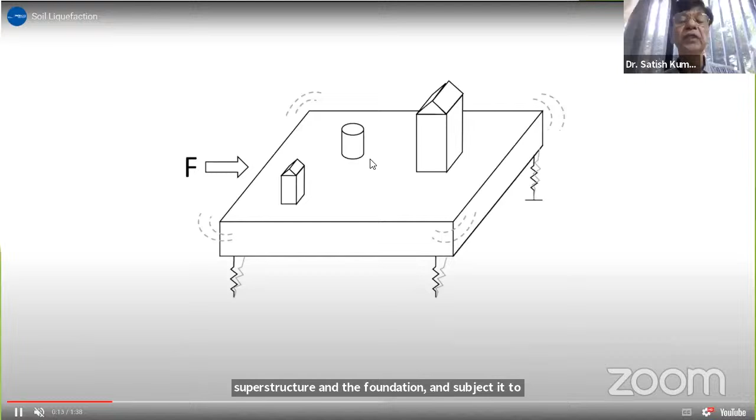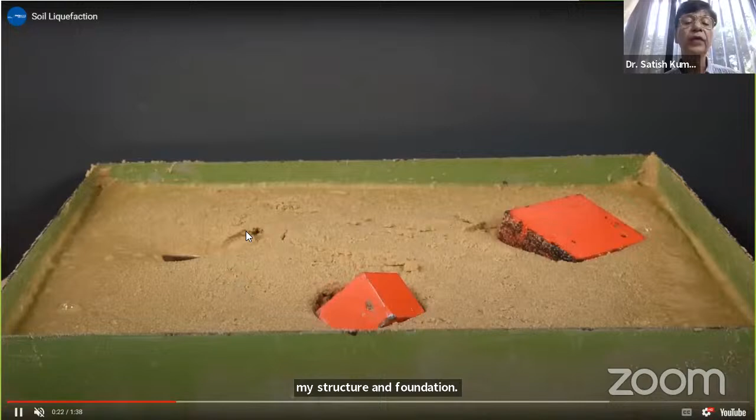Let us see this slide. In a shake table we can do simulation. We can have a spring-mounted system, a tray, and soil available at site, subjecting a sample of the soil to testing. We can have a model of the superstructure and foundation and subject it to the forces, and see the reaction, how the soil behaves. This is the model of my structure and foundation. We call it quicksand also, or liquefaction. See, soil boils, we can see sand boils, we call it. Actually on the ground, in a liquefaction-affected area, we can see sand boils around. Just see what happens, this is exactly what happens in case of liquefaction.

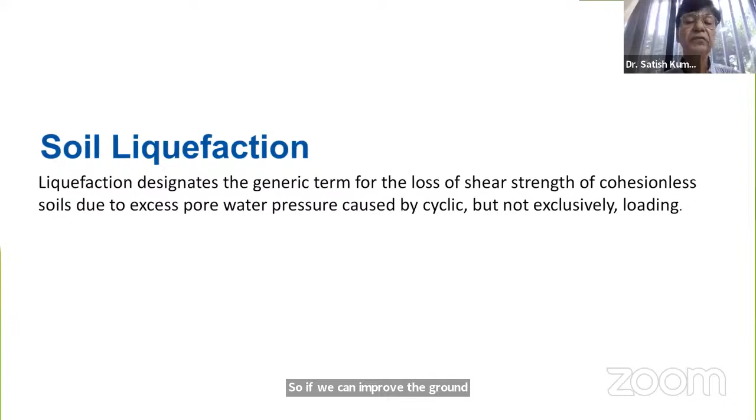So if we can improve the ground, it can help. We'll see further pictures on that to enlighten us further.

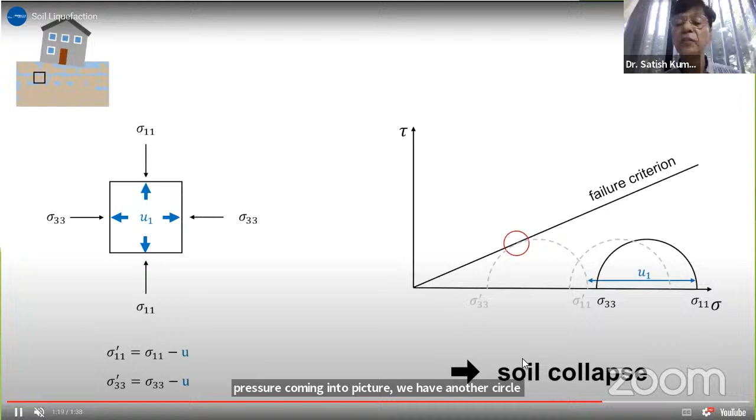As such, this structure is safe and sound, but due to application of dynamic forces, pore water comes into picture. If we consider one element of soil like this, it is subjected to normal major and minor principal stresses. This is the Mohr circle. Failure envelope, and we are safe as long as it is away. Now, due to pore water pressure coming into picture, we have another Mohr circle corresponding to effective stresses. As it touches the failure envelope, as per our theory, soil collapse will take place. This is exactly what happens in case of liquefaction.

Now let us have a closer look at this Japan earthquake.

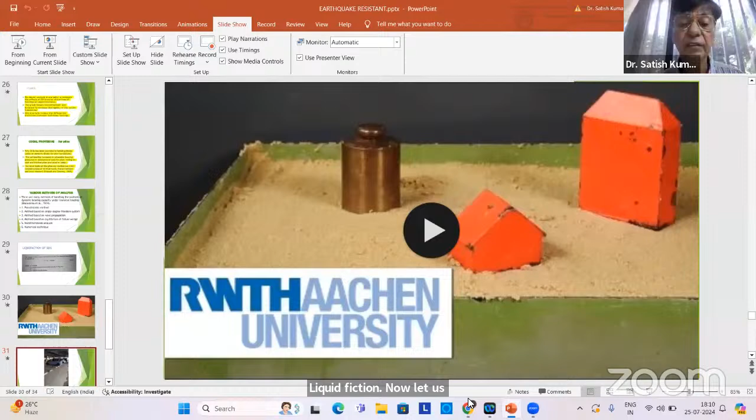Magnitude of this earthquake was... are you able to see the slides? Somebody may confirm, sir, is it visible? No. Okay. Slide is not visible, sir. Not visible. Now? No. Now, sir? No, even not? Okay, sir. Are you able to see now, sir? No, just say without slide.

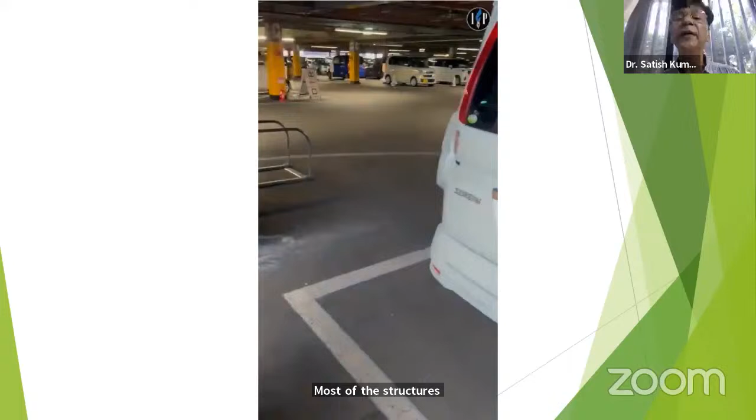You see, even in Japan, most of the structures survived except load-bearing structures, because they are using damping devices, etc. But there also they faced casualties to the tune of 160 persons.

Here in our earthquake, the magnitude of forces, what happened in Kashmir, the lateral forces were just to the tune of 3% of what they had in Japan. Our casualty was 2,000, in Uri, Tangdhar and Kamalkot, because our people were doing stone masonry in mud mortar without following proper norms, etc. That is why we faced problems.

So we trained all those people. I constructed model huts, model construction in Uri and Tangdhar region, in brick masonry and stone masonry. We had training programs along with IIT Roorkee. We trained all those engineers in earthquake-resistant construction. Those practices were followed. All the engineers trained by us were sent to various villages, 95 in number. They certified that reconstruction had been done as per our norms. Then only did the government release assistance. I ensured this practice right up to the line of control.

So let us conclude. Earthquake loading is highly probabilistic, not deterministic at all. Japan faces 6 to 7 earthquakes of various magnitudes every day. We also face this; in the middle Andaman near Mayabandar, we have volcanic activity. One particular island, a barren island, has lava eruption every day, so no habitation is possible there. Earthquake cannot be avoided, nor can it be predicted. So we have to focus more on proper design and detailing and ground improvement. That is exactly what we are doing in Central PWD. We don't have any magic, we are simply trying to follow the norms, and my structures...

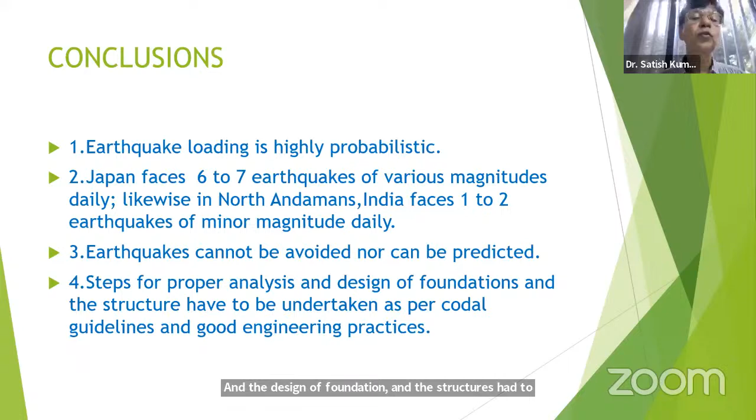Steps for proper analysis and design of foundation and structures have to be undertaken as per Codal guidelines and good engineering practices. So here I quote the books which are followed by Professor Maheshwari of IIT Roorkee, who conducted the course on earthquake-resistant design of foundation, by my great Professor Shamsher Prakash, with whom I had the honor of working before joining Central PWD.

This is a great international book, easily available for download. Kramer's great book on earthquake-resistant engineering is also easily available. Bowles' great book - most of the material is in static conditions, but he has given some content relating to dynamic parameters also, and a lot of data is available. The Indian edition is easily available.

And there is a great book by Professor Gopal Ranjan at Roorkee and A.S. Ramchandra Rao - great book. And there is yet another book by Professor V.N.S. Murthy, Advanced Geotechnical Engineering, another grand book. Professor Swami Saran, student of Professor Prakash, upgraded the book in 1981, this edition is from 2006, and he has come out with yet another book in 2019, easily available, marketed by Wiley International.

All these books give most of the information which I have given in this short time span of one hour. I am thankful to all the participants. There were constraints of time. I have tried to consolidate the information from all those books I have cited. I have personally gone through each and every word, including Professor Swami Saran's latest book from 2019. I have gone through all those 40 lectures of Professor Maheshwari.